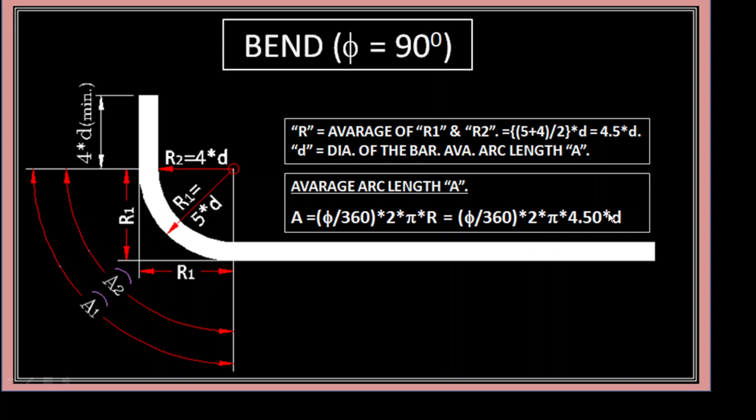Average arc length is equal to phi by 360 into 2 into pi into R, that is phi by 360 into 2 into pi into 4.5D. This formula is applicable for all the bends.

This is a hook, that is phi is equal to 180 degrees. Same formula - this is straight length and this portion is 4D minimum.

This type of hook has bend angle greater than 90 degrees but less than 180 degrees. This portion is straight portion, this is straight portion, and the formula is the same.

This is table 2, hook and bend allowance as per IS 2502. This is bardia, this is hook allowance - minimum and recommended. This is bend allowance - minimum and recommended.

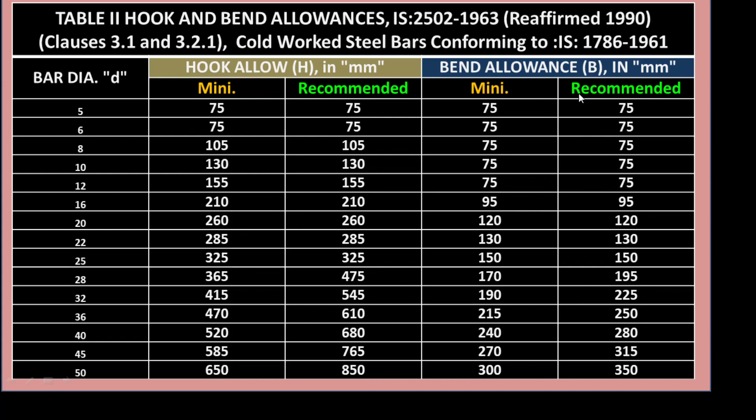Types of bar as per IS 2502. There are 31 types of bar.

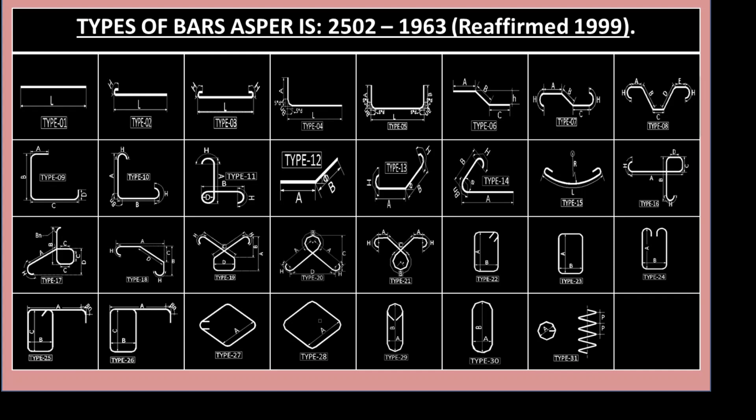Now I am switching over to Excel spreadsheet for the numerical calculation. Once again, welcome to my ultimate solution of BBS in Excel spreadsheet. This is our dashboard.

This is the type of bar. This type of bar is linked with this one, that means this is equal to this one. This is a small calculator to calculate the total number of bars or turns.

Say spacing of bar 100 and length 3000, giving 31. If it is 4500, then it will be 46. Now just click here, like the calculator, and it will disappear.

Once again, if you need 250 spacing in millimeter, length 4000, then total number of bar is 17.

This is a formula. For each and every bar, there is a formula. What is that formula? L is equal to length, A is equal to this side, B is equal to this side, plus Bn, here I have considered bending as Bn and hook as Hk, minus 20d, or d diameter of the bar.

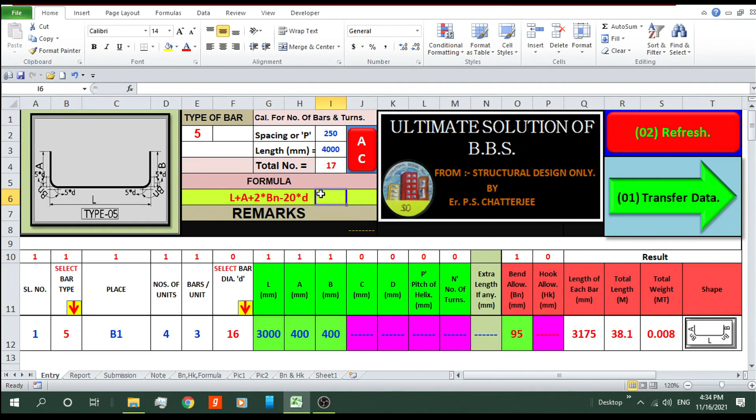Now first I am going to refresh the dashboard. Just clicking this, look, there is no value. I am going to give some value. Serial number 1, bar type 1, straight bar, place say S1, that is slab 1, number of units, spacing say 125, length 3500, 29, number of unit 4, bar per unit 29, bar dia we have to select, say 8.

So we have to put here only length. See, this is green color, other cells are pink color. So we are not going to put any value here. Even if we put some value by mistake, calculation will remain same, it will not alter. So we have to put the value of L, 3500. Look here, total length 4066. If you by mistake put some value here, 2500, no change will be there, but it will look awkward. So this portion is totally auto-generated. Do not try to change the value here.

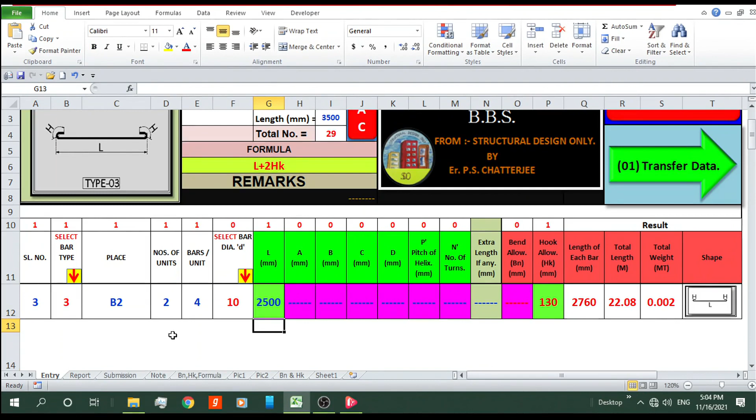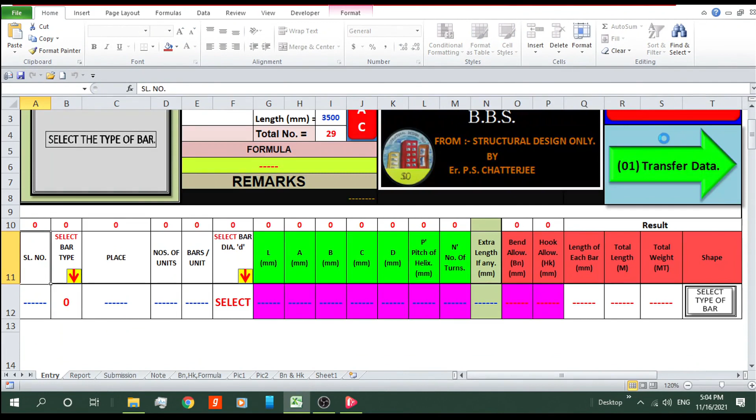Similarly, number 3, select bar type 3, B2, numbers of unit 2, bar per unit 4. Here we required length is equal to 2500. One second, transfer the data, it will come in this position. Refresh once again. After refreshing, you will not get a formula, no remarks. Select the bar type, notification, select the type of bar, etc.

Once again, put here serial number 3, select bar type 3, place say B4, number of unit 2, number of bar per unit 12, select bar dia 12. We need length only, length plus 2 HK, that is length 1250. So this is our result.

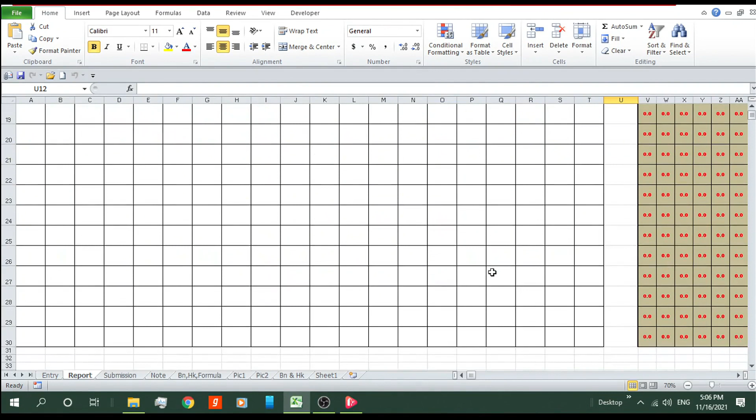Transfer this data, and this process by transferring all those data, when one stage will come when this is, it will fill all this cell. Then say 1, I'm filling all the gaps. Finally, we reached at the end of the sheet.

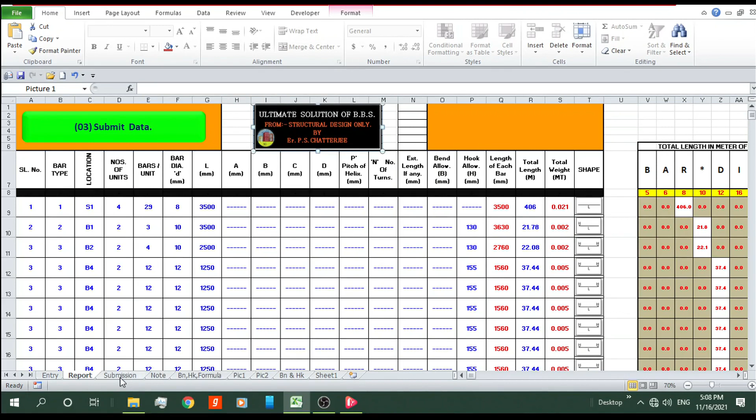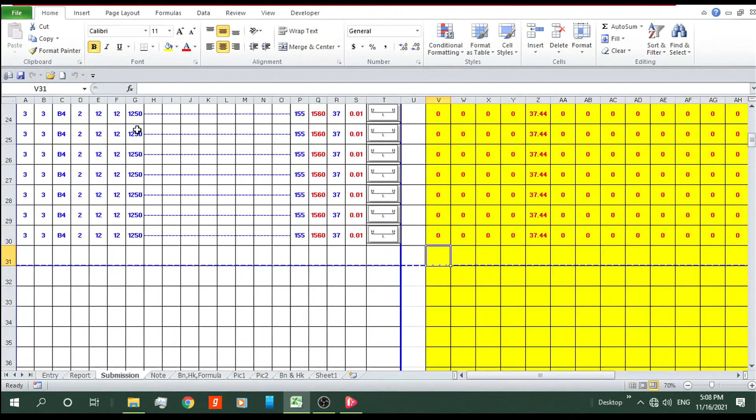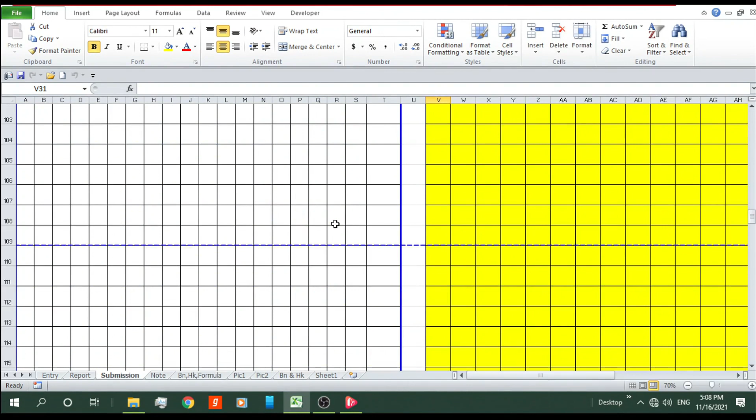First stage of data transfer. Now we have to submit all those data for submission. This sheet we are going to deliver our client. So just click here. All the data came to this sheet, and look here at the bottom. We have used 8, 10, 12 dia bar, and this is length, and this is weight, and this is total weight.

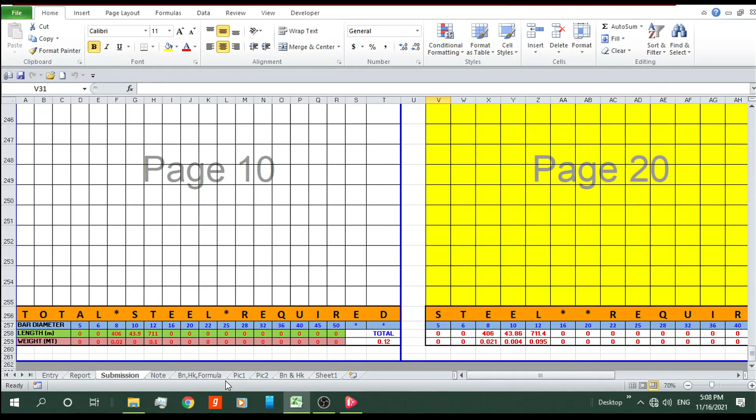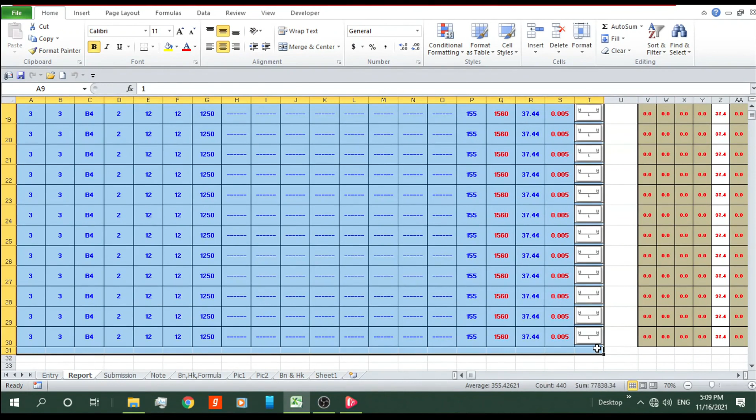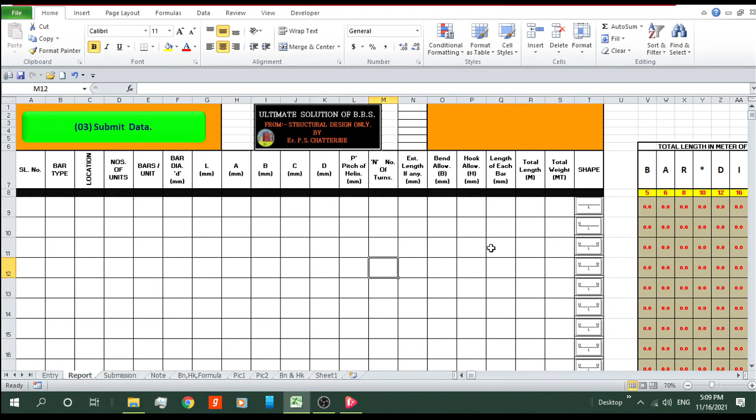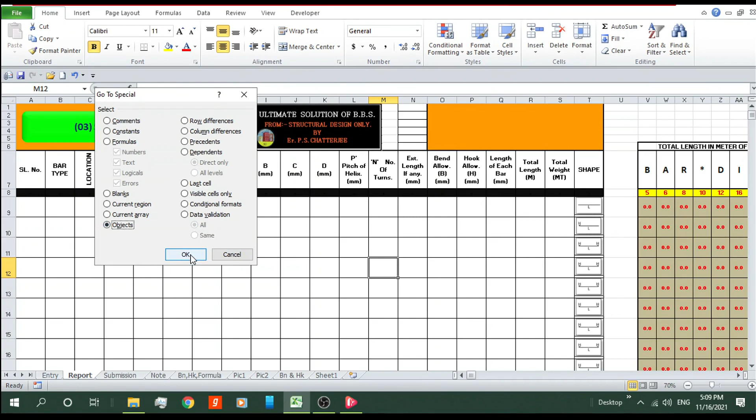Now the big problem is here. You can delete all those data. We have to delete this data because for next set of data entry we have to delete this. Now the problem is to delete this picture. There is easy solution. Select, find and select, go to special, select object. Okay, all the object will be selected. Now clicking control switch, just click on these two pictures and delete. Your sheet is neat and clean.

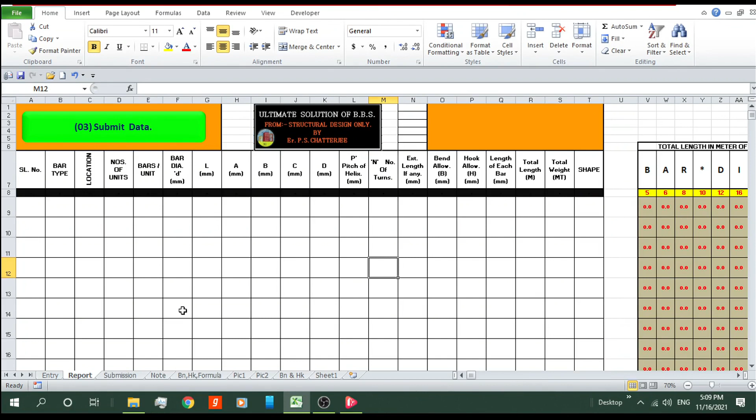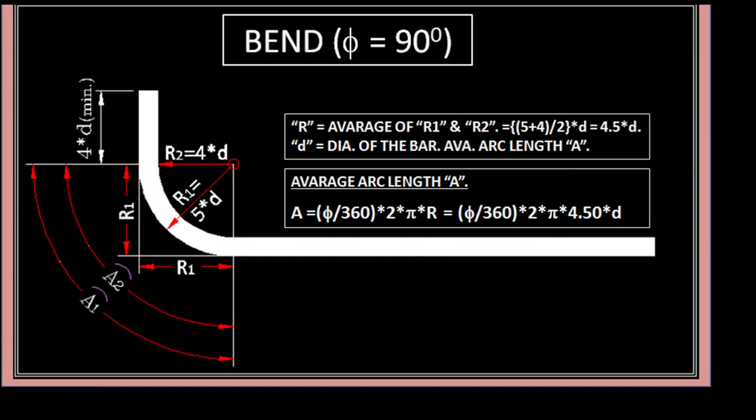So come back once again to the dashboard and put some value here and transfer all those data. You will get a total report and then summation. So we have to be a little bit careful about the refresh button. I have written here number 2 button, it has to be pushed after transferring the data. I have left one cell in gray color, that is extra length if any. So if you require any extra length for adjustment, you can put here, such as this 4D length. This 4D length you have to put here, it is not included in this hook length.

And that's all about my ultimate solution of BBS by two-stage data transfer. I hope you enjoy the ultimate solution of BBS.